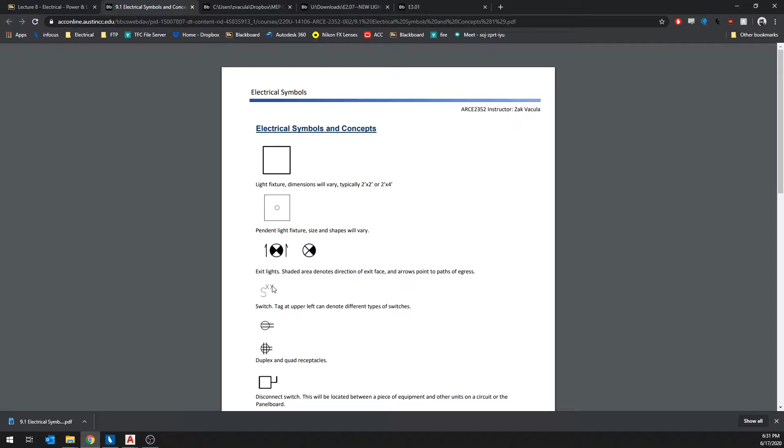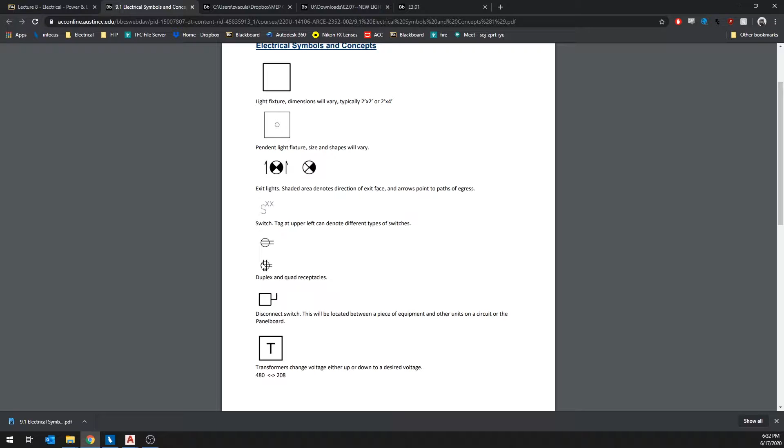And then these two symbols are the receptacles. This is your standard duplex receptacle, what you'll mostly see in your house, the plug with the two plugs. This one is a quad, so you'll have the receptacle that's twice as big as a duplex and has 4 plugs on it. This is the symbol for a disconnect switch.

A disconnect switch, remember, is how you turn off power to a piece of equipment. Here's a transformer. Transformers are how you either reduce or increase voltages.

This F in a box is a fire alarm pull station. Remember, this is one of the fire alarm initiating devices that you can pull to manually start a fire alarm. This square with the AV is the audio visual alarm that flashes a strobe and sounds an alarm when active, so that would be one of your notification devices.

This one is a fire alarm, visual only, so it's only a flash. That's also a notification device.

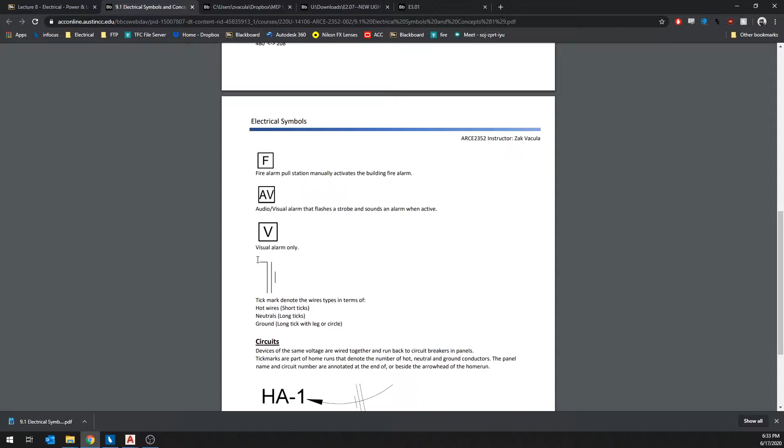This symbol right here, these are called tick marks. Tick marks denote basically how many wires and types of wires are run for a circuit. In this instance, this is 1 hot, that's a short, 1 neutral, and 1 ground wire. The ground is the long line with a leg.

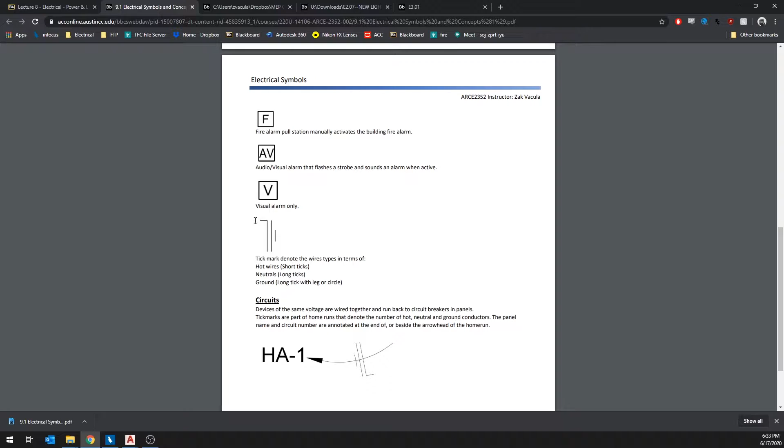All right, so this is actually called a home run for the circuit. Any device on the same voltages that are wired together will have a home run, and then have a tag right here that indicates what panel name. So this is going back to panel HA, and it is in the first space of the panel. And then you have your tick marks here that denote how many wires are on this home run.

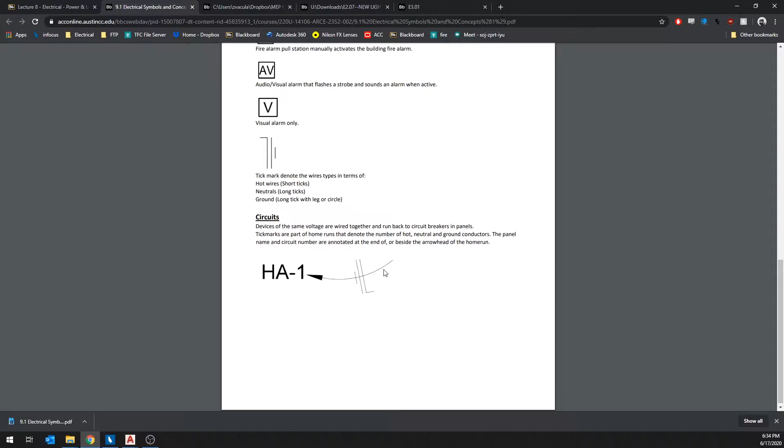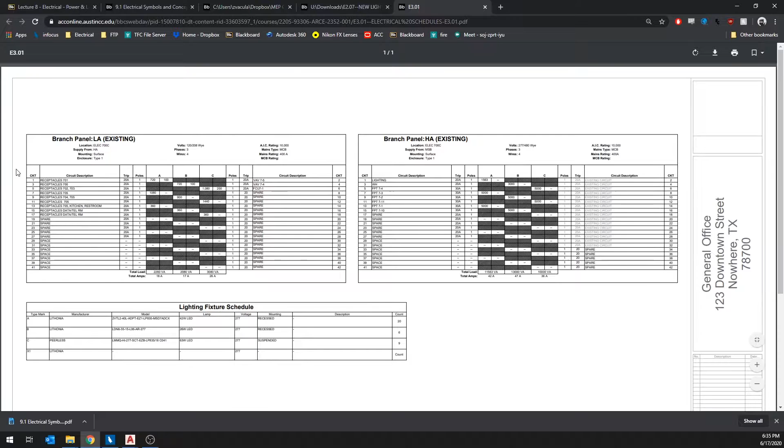Now, if we look at our panel board schedule, notice that it kind of looks like so—think about the panel board at your house. You have 2 rows of switches, one on the left and one on the right. This is what this is indicating.

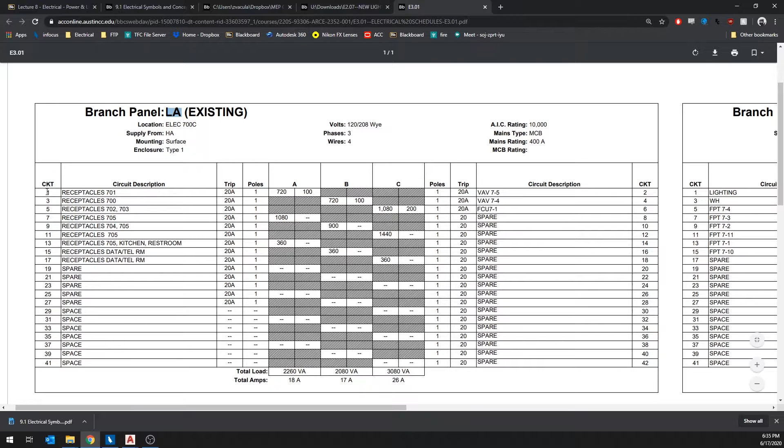So this is panel LA and circuit 1. We're looking at receptacles in 701. So this is conference 701, receptacles LA1.

We'll also have to show the electrical connections to the mechanical equipment, so we'll actually need to import our mechanical equipment from our mechanical new plan. And then depending on the voltages, you'll either have a disconnect switch, or even if it's a smaller voltage, single phase, you can run basically a heavy duty light switch as a disconnect switch.

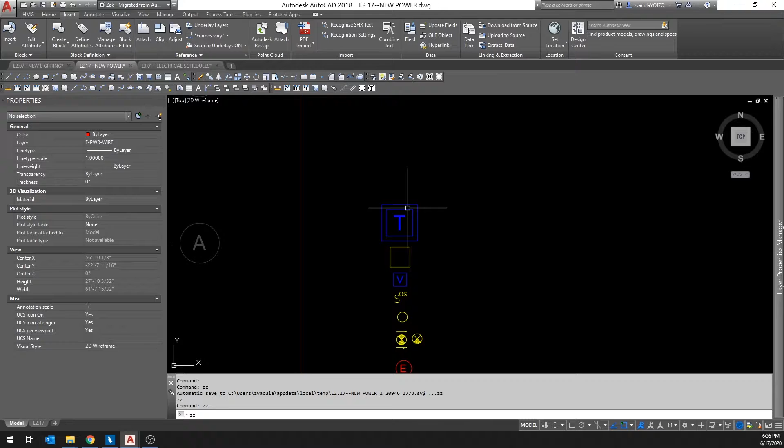I'm going to show you how to create a palette so we can easily insert these blocks and rotate them at the same time. In your Manage tab, you'll have tool palettes right here.

I'm going to turn my tool palettes on. Mine will look a little different than yours because I have mine set up for work. By default, you'll have a ton of different default palettes from Autodesk, but we're going to create a new one, so the process will be the same.

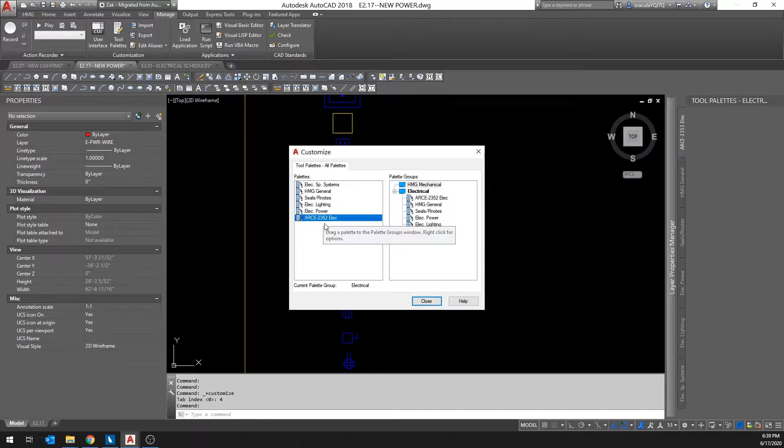I'll right-click, hit Tool Palettes, that'll pull up your Customize menu. I'll right-click on the left-hand side and say New Palette. I'm going to call this one ARCE 2352, this class, Elec. You can really do this for any class that you find yourself using blocks over and over again. Makes it really handy.

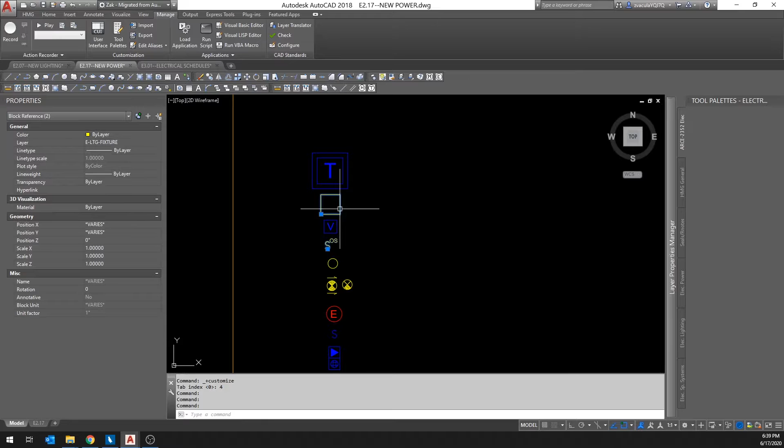Mine is going to be docked on the right-hand side; yours may be left or just free-floating. I'm going to drop some of these blocks onto this palette that I know I'll be inserting and rotating a lot. These lights I can just copy and paste since I'm not really going to be rotating them. But I know these switches I will be placing on these walls and need to rotate so they sit on the wall correctly.

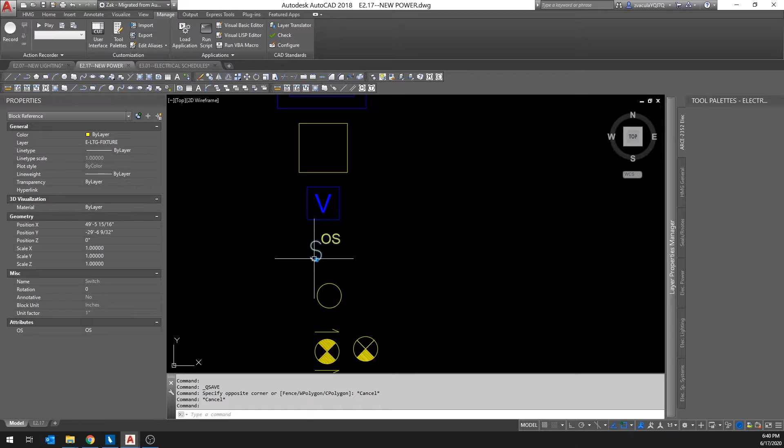To do that, first you want to make sure you have your drawing saved—if you haven't saved recently, it'll give you a warning. Then I'm going to select the block, and you want to grab any part of the block that is not this point. So I'll click and drag this onto my palette. You see that black line there? That means it recognizes it and will add it in here.

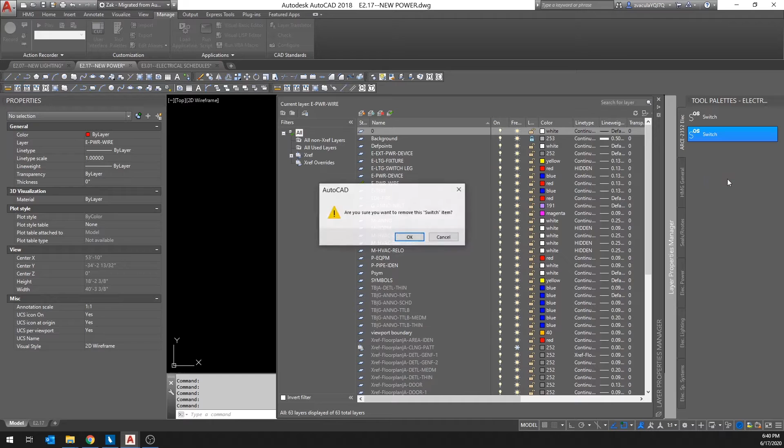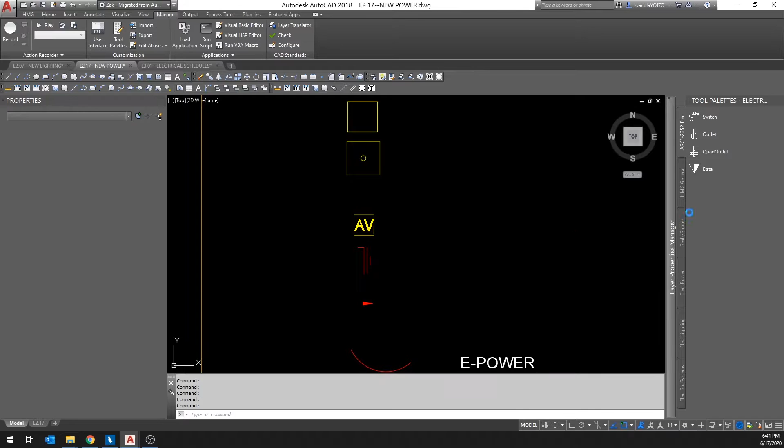I'm going to add a couple of these switches. Definitely plugs, because those will need to be rotated with the walls. Quads. Definitely the tick marks, because we'll need to rotate those to match our arcs and the arrowheads. So the tick marks, the arrowhead, and the arc—these will make the home run. And then switch leg, that's for lighting.

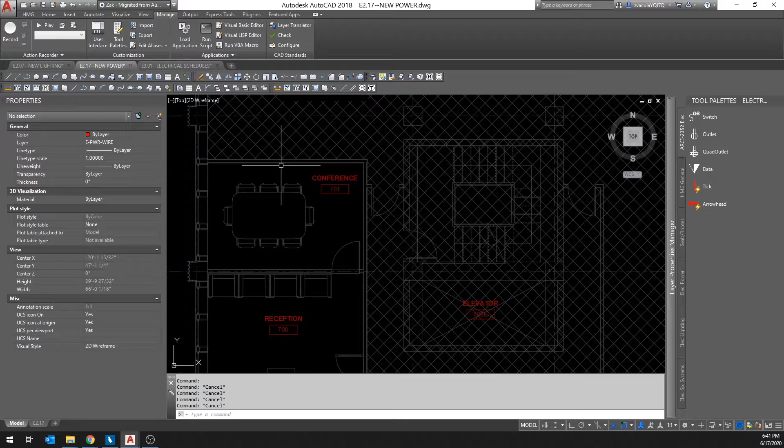Say I want to drop an outlet on this north wall. Select outlet, then click on the wall, so it places the block—but it didn't rotate it. So for each of these blocks, you'll need to right-click on it, do Properties, and there's an option here, Prompt for Rotation, and I'm going to say yes.

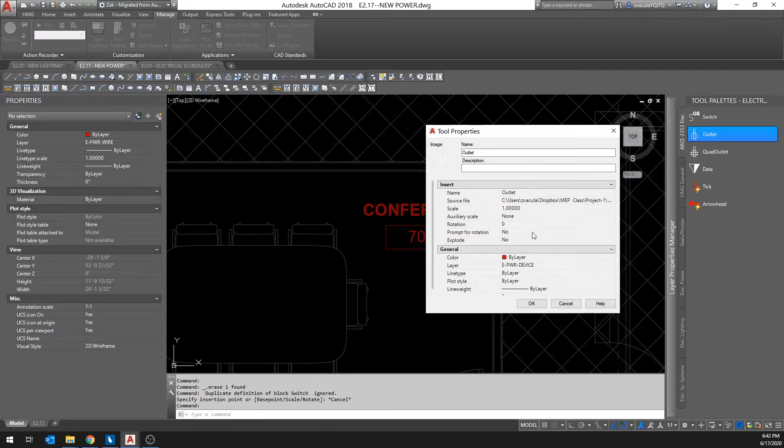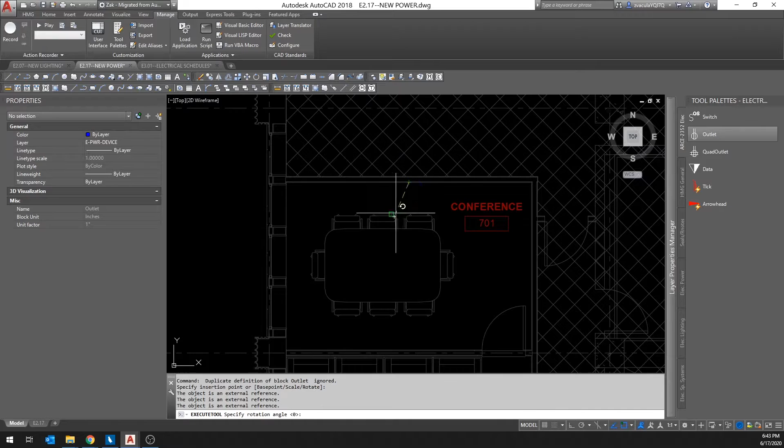What this will do is let me select, let's do an outlet, prompt for rotation, yes. Now when I place an outlet, I can drop it on the wall and rotate it to whichever way I need. I have this set up so if you have either your O-snap on or ortho, you can just snap it to the wall and it will make it the correct direction. So outlet, let's put one down here.

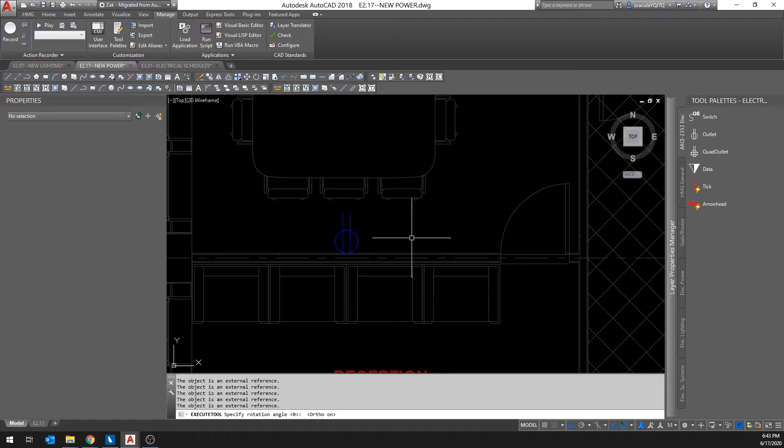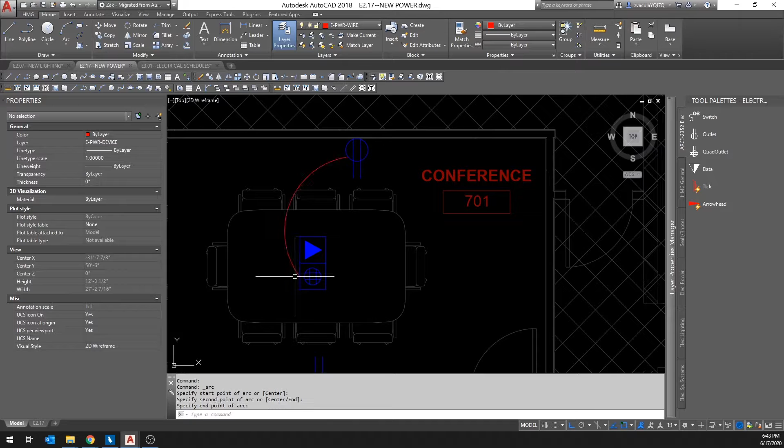And just for wires, we're just going to use an arc. Now let's make a home run for this. I'll just make a home run like that. And then each home run needs a tick mark—I'm just going to drop it, midpoint's fine, turn off ortho.

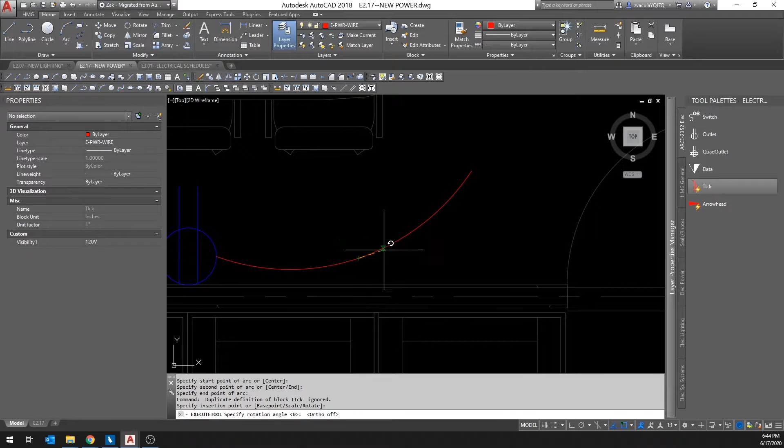The way I have this set up, if you have your O-snap on—and I usually like to keep all my O-snaps on—nearest will basically snap it to just whatever line you're hovering over. And then, arrowhead.

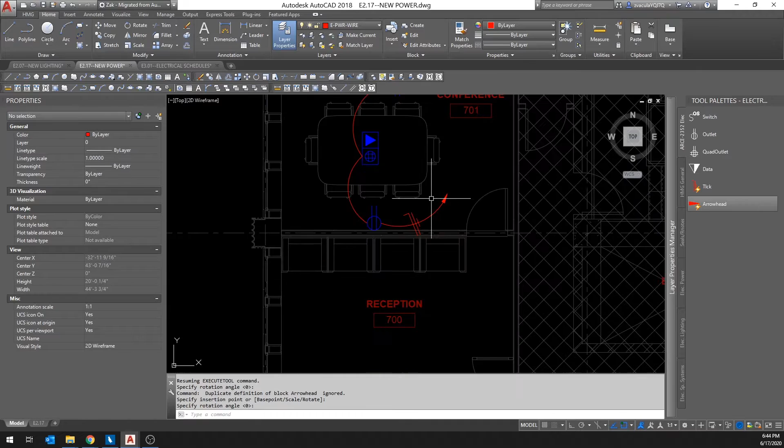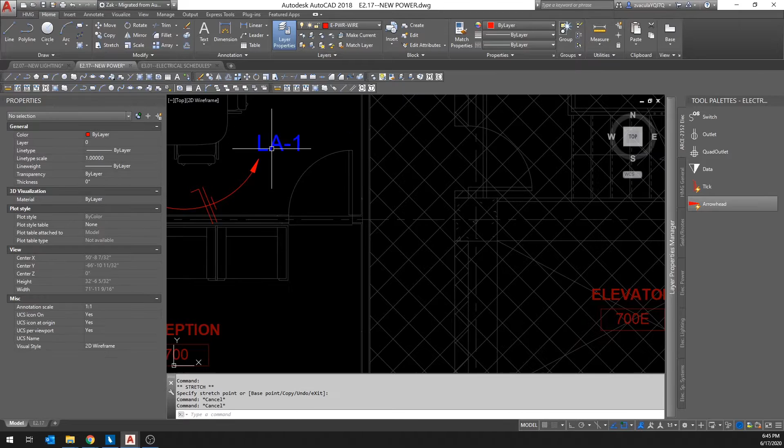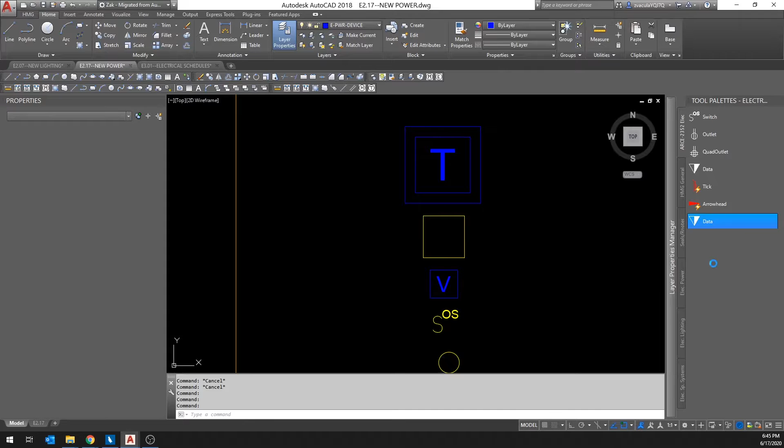So that's going to be how you go through and do all of your power—you'll want to throw data in there too. And if you do this transformer, the actual block is just the inside part here, so you want to make sure you select the block and not the point. That point is for if you were going to try to move this block around.

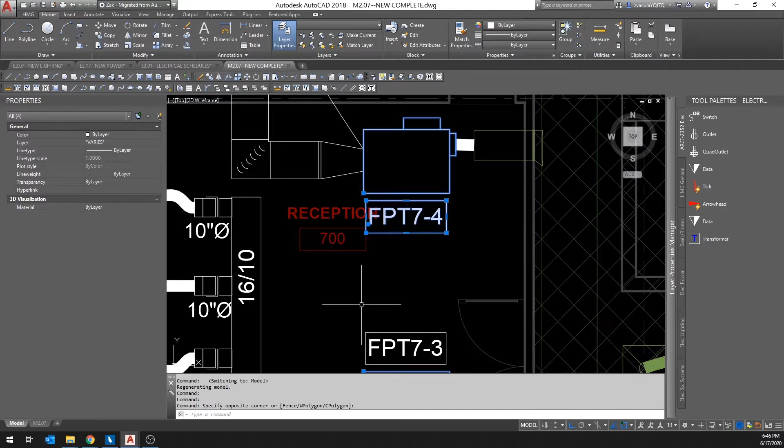So let's go grab the mechanical equipment that we'll need to power, and go grab the tags because we do want the units tagged on the electrical plan.

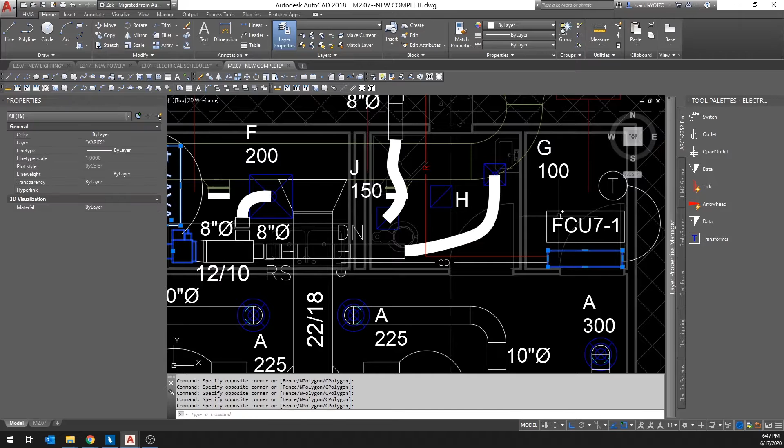Make sure you get the fan coil unit right here. And make sure you go back and get the plumbing, the hot water heater as well, and paste that in. All right, so get these last two here.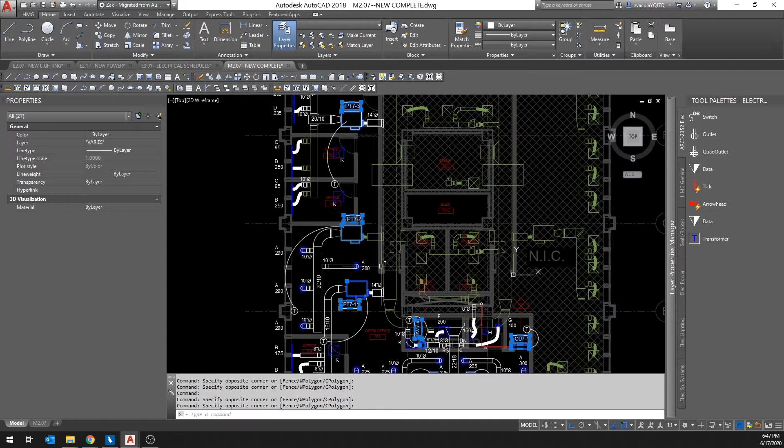And once again, we're going to use copy with base point to make sure all this aligns. So Control Shift C. Just use the end of the grid here. End of the grid.

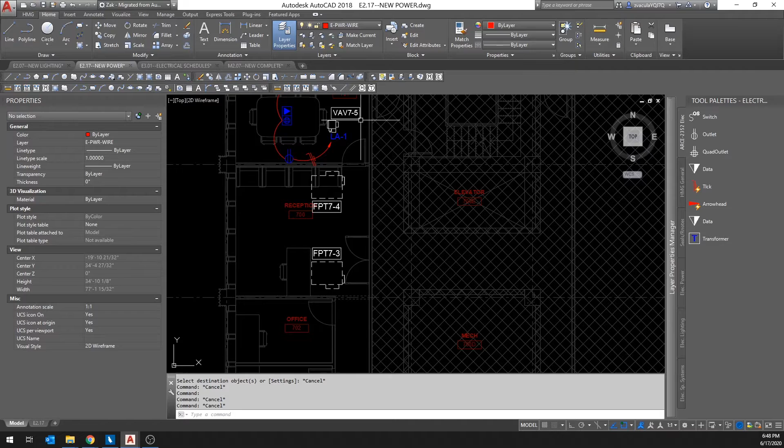So you could just leave the blocks on the layers that they're on. These VAVs won't turn dash just because of how small these lines are. Basically, these two are too small to inherit these dashes. Let's actually rotate this guy down a little.

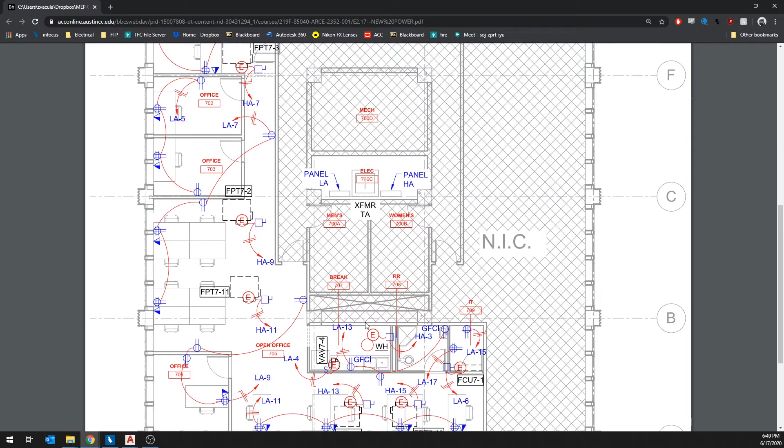All right, so you will continue through and put in your electrical connections to a disconnect switch here. And all this E in the circle represents is that you have wires that are connecting to a piece of equipment. So anywhere, for any piece that's not a plug or anything like that, we'll usually show an electrical connection. Here's one for the water heater, FCUs, VAVs.

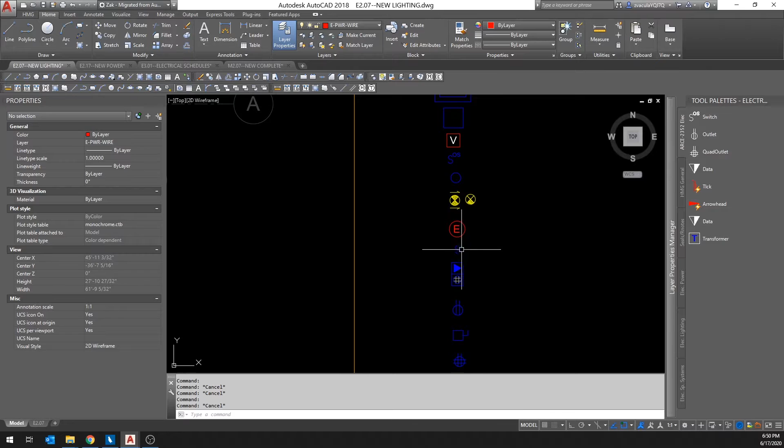All right, and then once you get done matching the red line, we'll look at the lighting. So the lighting, once again, you want to use the symbols over here or in your tool palette. So you have your 2x2s here. So these are 2x2 troffers.

On this plan, you'll notice that you have dashed lines in conjunction with solid lines over here. So let's take a look at this conference room. You have these 2x2 troffers that are type A being controlled by this occupancy switch, and everything that is connected via these dashed lines, this is being controlled by this controller right here.

And then if you see a solid line jump between the two, that's just a straight power connection and doesn't carry any sort of controls. So we know that this is all on one circuit, but if we look at these dash lines and it goes to this OS right here, so everything connected by these dash lines, this is all on this one switch.

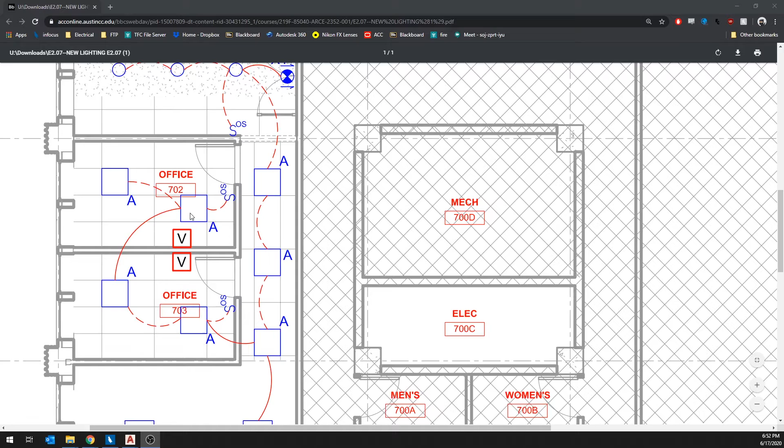Then you get to this light and you have two just power jumpers. So all of this stuff is controlled by this switch. Then you go into this office and this is controlling these two lights, power, switch leg. So it's essentially how we differentiate between switching and being powered on the same circuit.

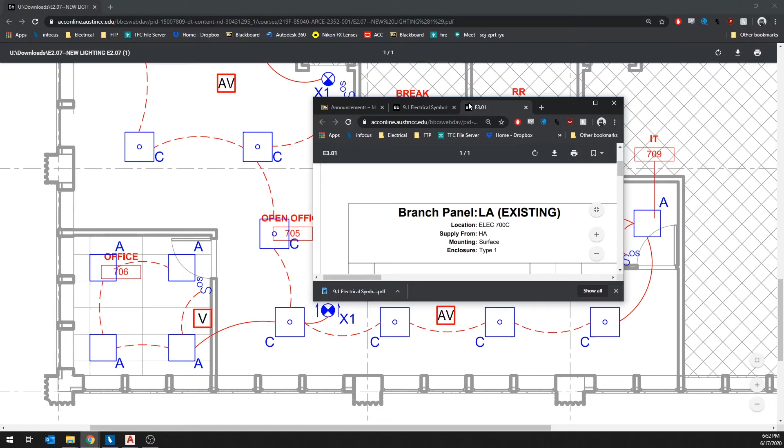So notice that there is only one home run in this whole office. LED light fixtures are really, really efficient nowadays. You can put a whole bunch on one circuit. So all of these go to HA1. And if we look at our handout over here, HA1 is lighting.

All right, so you will go through and you'll add your lights, your switches, your wires, your fire alarm equipment, and your exit signs.

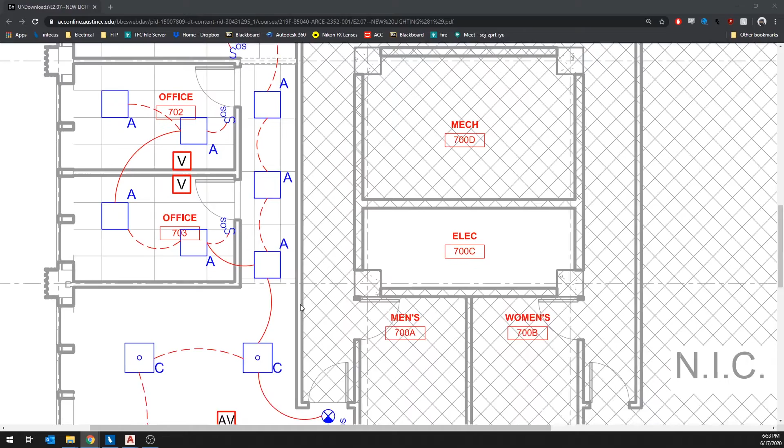And then once you have the power and the lighting done, let's take a look at the schedules. So I gave you the schedule set up. Usually you'll have a template for your schedules. You won't ever have to draw these from scratch.

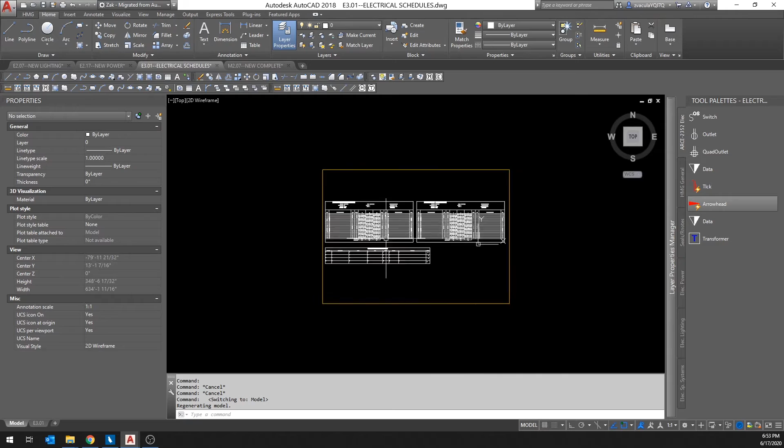So looking at the schedules, you will go through and match the red line. So LA existing, we'll go through and say receptacles 701. Receptacles 700. So you'll go through and you'll do your descriptions.

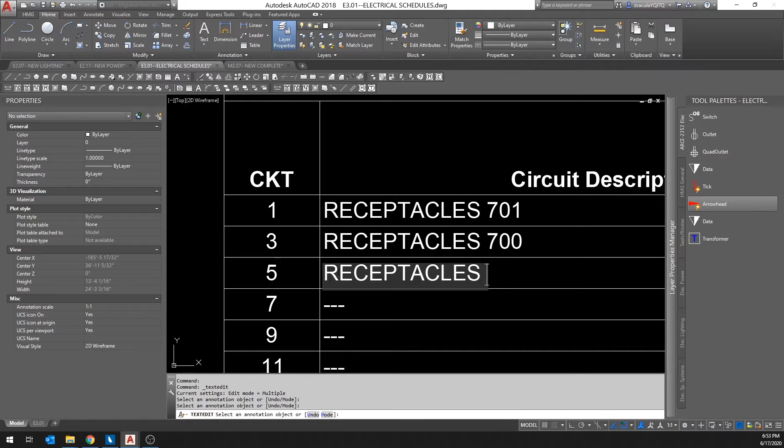And do your trip. So this is basically the size of the breaker. So it's a 20 amp breaker, single pole. And then you'll do your load here. So 720, 20.

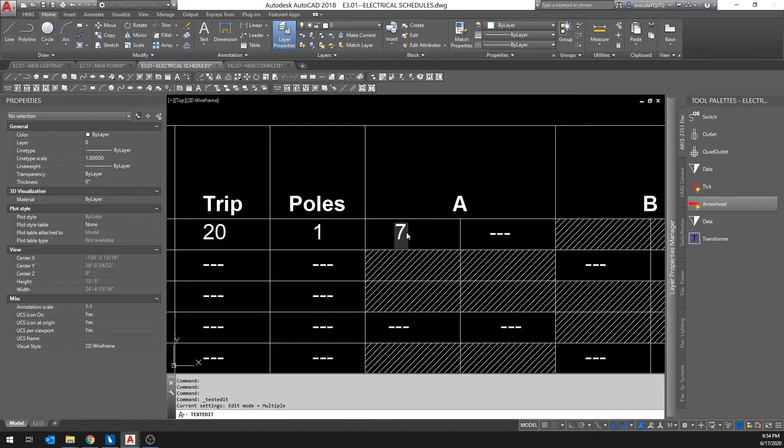And so let me show you that when you have just straight text and not M text. So text, remember, is like the single line text. So if you come in here and you enter, it doesn't return to a new line.

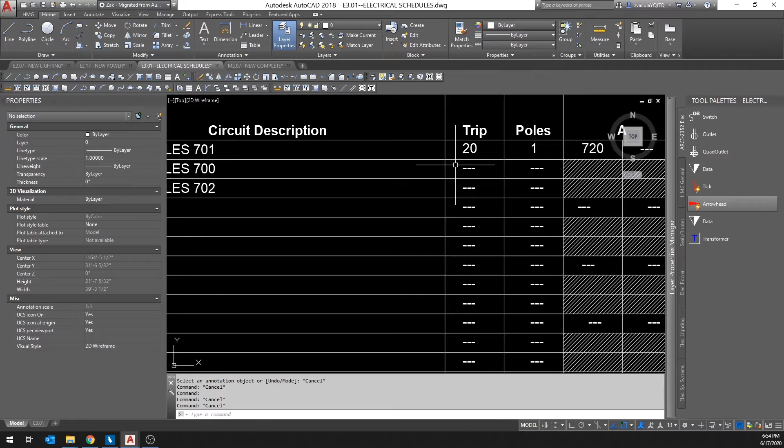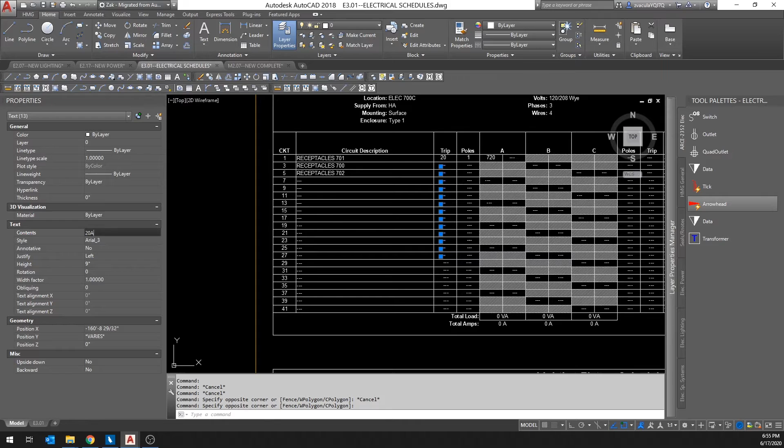It's only single line. This can have its advantages in the fact that you could mass change these all at once. So we know that circuit 1 through 27 are all going to be 20 amp single pole. So to quickly do this, we can just go and select 1 through 27 right here. And here in contents, you can type here 20 amp, and it'll change everything all at once.

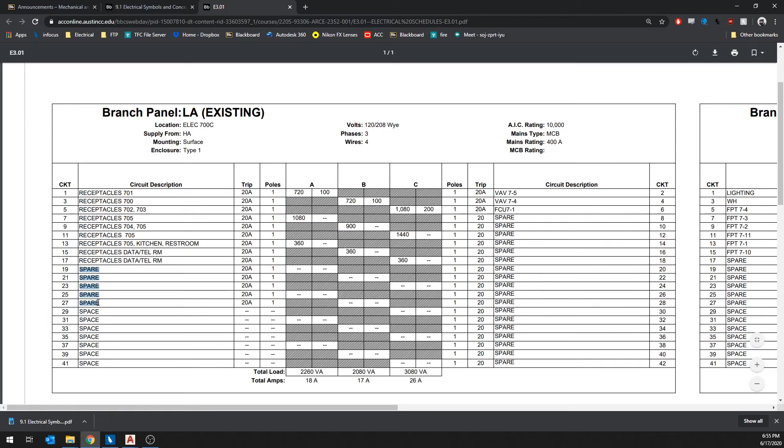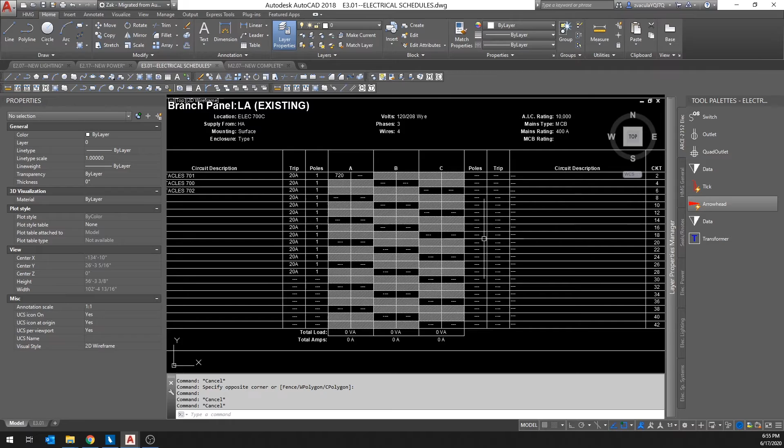And then these are all single pole, so contents 1 there. Also, notice that you have spaces from, so 20, you have spares from 19 to 27. So 19 to 27, these are spare. And then 29 through 41 are spaces. So you can really do a large chunk of editing of this single line text this way.

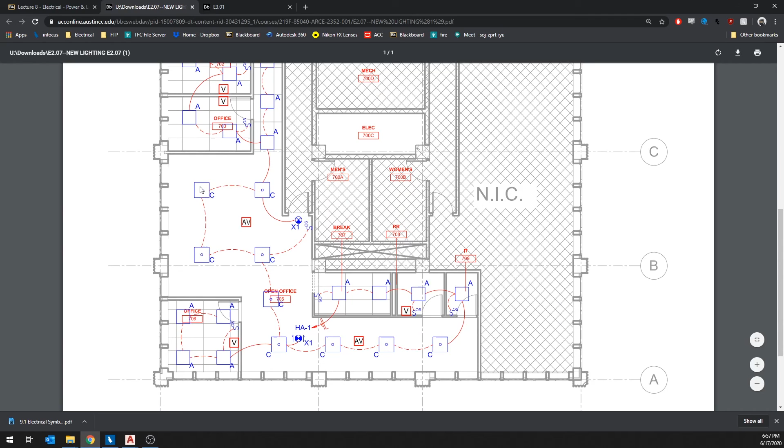So you see A is a 2x2 fixture. A is a 2x2 fixture. And then this is the part number for the light fixture. And then B's are LDN6s, so these are can down lights, 6-inch can down lights. Then you have this C that is a pendant light. And lastly, X1, these are your exit lights.

All right, so once you get the power, lighting, and schedules done, you are done with the electrical floor plans.